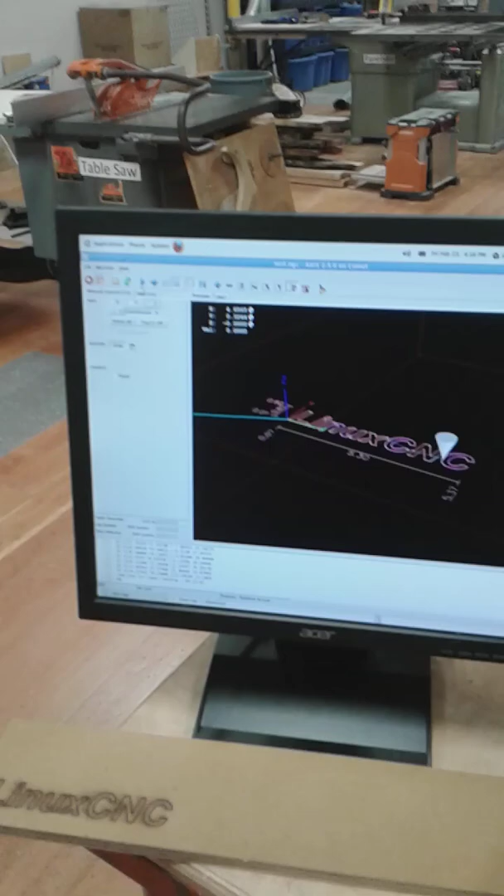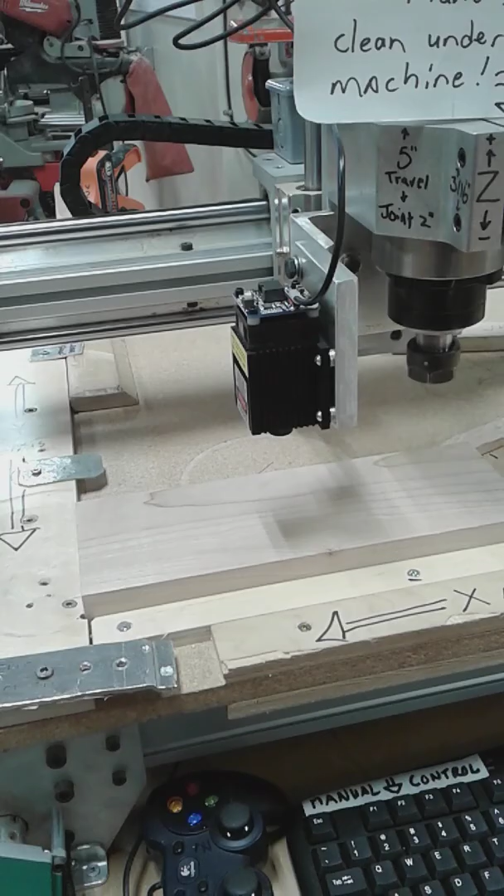Hey, it's another mad day in the DSS Big Wood Shop, and we're working with our CNC router, and we have attached a laser head for doing some laser engraving. We got this a while ago and we've been meaning to set it up and just finally got some time today.

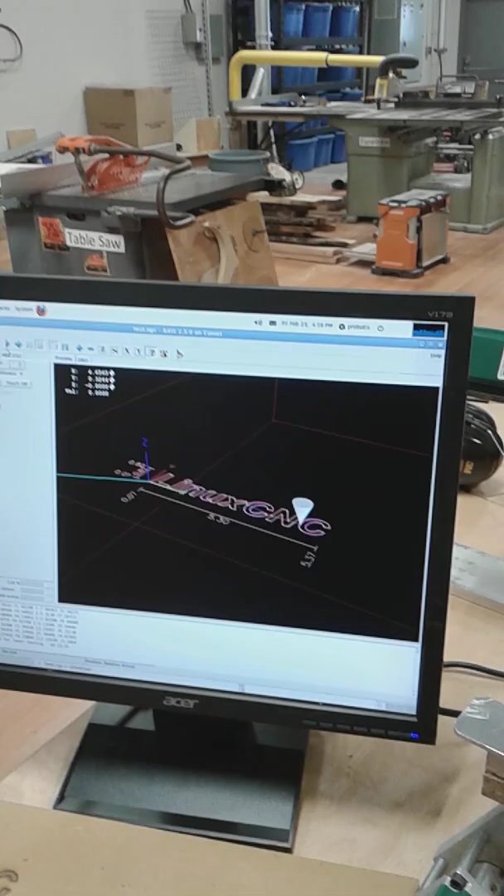So to make this all work, we've actually plugged this guy into the spindle power, the 110 power, to turn the spindle on and off, if you were using a cutter, and we've had to write some custom G code. So instead of doing vertical Z travels between what the file is cutting, we are just leaving the Z constant, focus the laser, and then turning the laser on and off with some custom G code. And that G code is right down there.

So this is what comes with the program from Probotix. What I did is I just got that into a test file, and then in that test file I wrote some custom code. Right here, we got rid of the Z travels, and there's where I turn spindle on, so turn the laser on. To make this work for the first time, it had to have a speed in there. I need a 0.5 second pause before it actually starts executing the G code. We found there were some gaps because there was a latency in the laser actually turning on. And then M5 is turning the laser off.

So I manually edited this file, so now we have one that works, and now we can go to our post processor, edit that, so if we want to do some custom file engraving for our game machines that we're making, then the G code that's spat out with ArtCam will actually do that for the Probotix machine.

Okay, so let's minimize this window and go back into our LinuxCNC program. I can zoom in a little bit there. And there's the code. Okay, looks like we're ready. Let's give this a go and see what happens. I've got my special glasses on, my 140 to 590 nm, to filter out the wavelength of light that this laser puts off. All right, here we go.

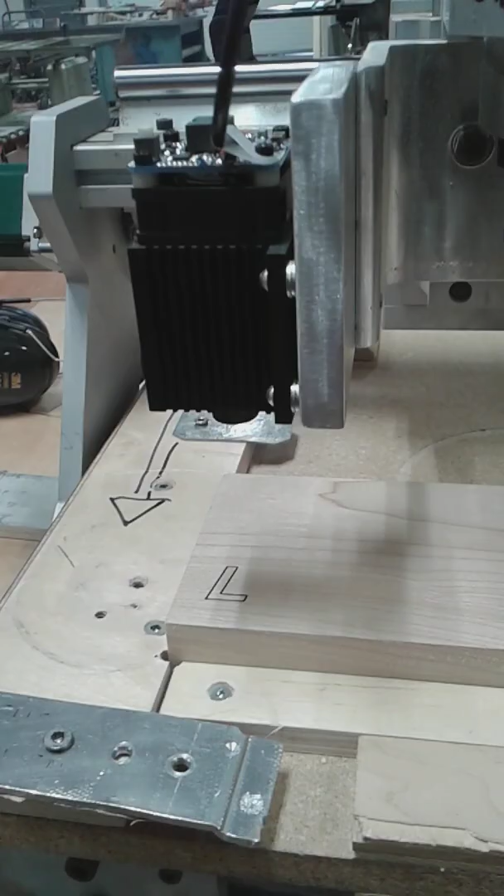Well, that's fascinating. With the little tablet I'm using to take the video, you can see all of the laser light, but my glasses filter that out, so I can't see it. I can only see what's actually hitting the wood. So that is pretty cool. There's the machine actually bouncing through the code.

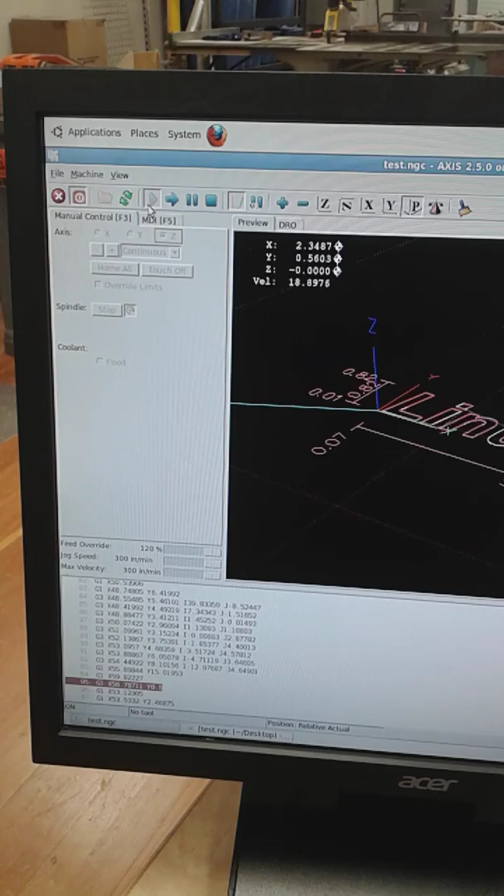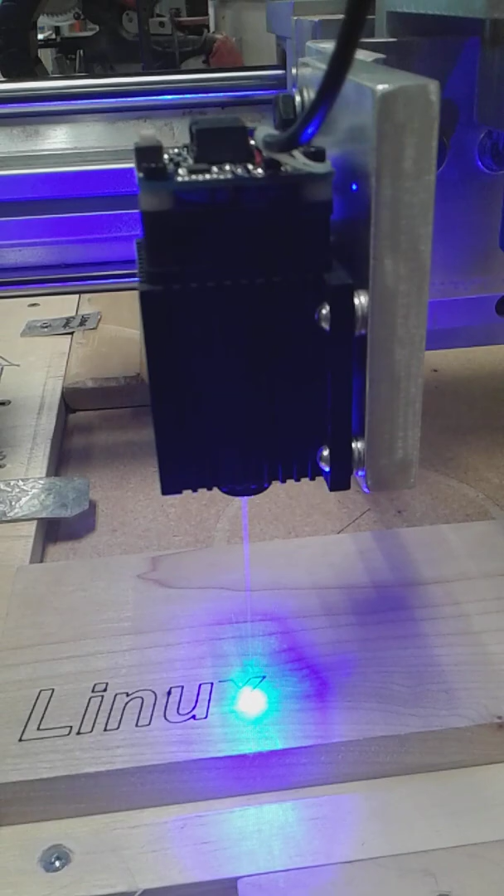I'm sure we're going to have some fine tuning to do as we start to program some files, but for the most part, the manual edit of this code that came with the machine seems to work really well. And again, that 0.5 second pause we found we needed to add, I think it was the G04 command, to accommodate for the laser actually turning on and off.

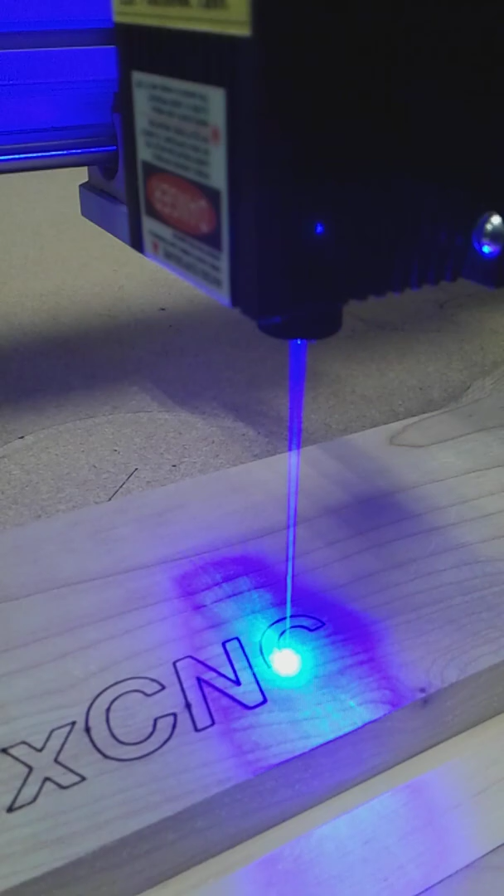Looks like I'm really close. I've actually got the tab quite a ways away, but look at that. How cool is that? Wow, look at that! Yay! So we were doing some 2x4s and they seem pretty soft, so I guess it depends on your type of wood. And down here, it is pretty deep. It's getting down almost to a 1/16, so that's fantastic. So this is really cool.

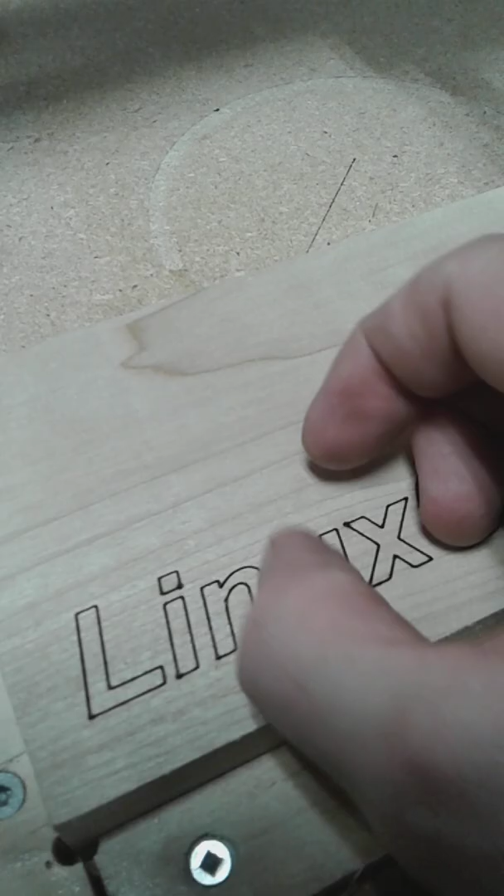So for our game machines, I wanted to do some laser engraving of the power port and the top of the board and some graphics and stuff. So this will allow us to do that. So that's pretty cool.